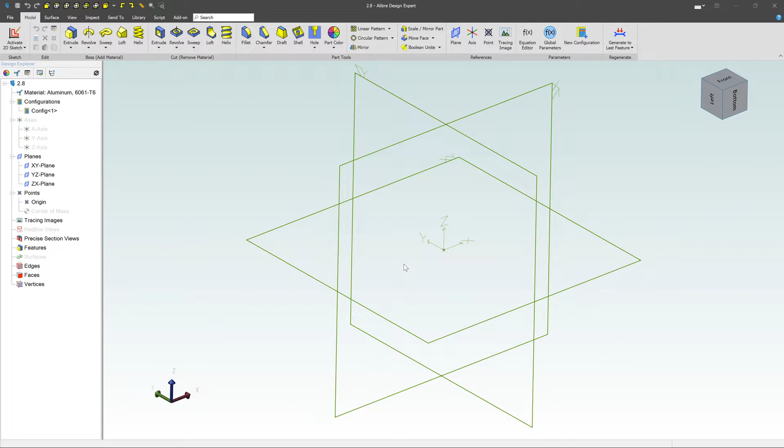To create a loft, we need a series of sketches that we're going to be creating a feature between. The most basic would be just two different planes. So I'm going to go ahead and hide a few of these other planes. I don't want to see this plane right here, or that one either right now. I just want to have this XY plane.

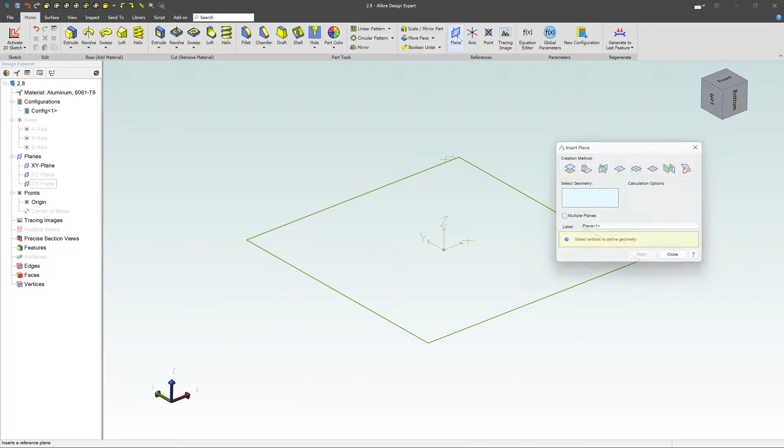So that's where I'm going to start with. Above that, I need to create another plane so I can have another sketch to draw something on. I'll go ahead and do that from the beginning. Come over here to references, then to plane. I'm going to choose that first plane right here, and all I want to do is an offset, so I'll say something like 5 inches. It's going to create a new plane directly above the old plane. Here it is, plane number 1. You can rename it if you'd like.

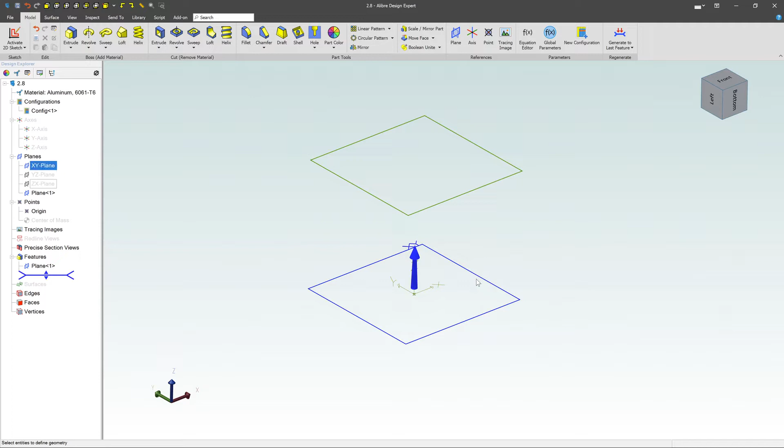Now what I want to do is create some individual sketch geometry. Come down here, select that plane, right click on it, and say I want to activate a sketch. Let's just do something super basic, like create a center point rectangle.

I'm going to start at the center and drag something out here. I'll type in something like 3 inches, hit tab, 3 inches again, and I've got a perfect square. Notice it's not fully defined yet because it doesn't know the rotation. If you don't know what's wrong, grab one of the nodes and pull it around—notice how it can rotate. A quick trick here is to select a line and say, let's make that one horizontal. Then everything shows up fully defined as black.

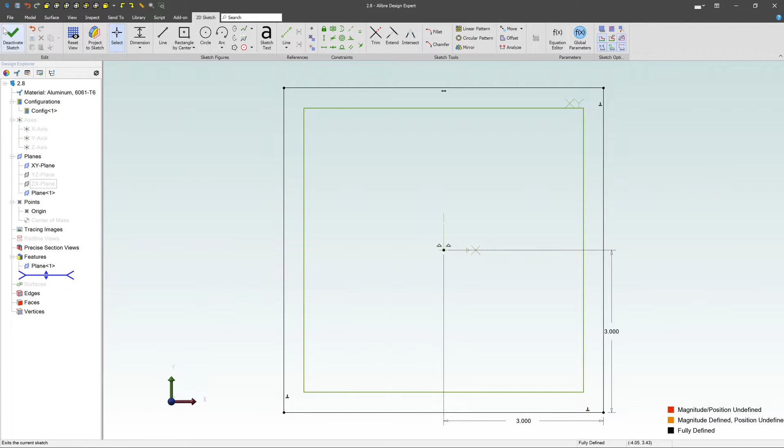Okay, deactivate the sketch. Let's look at it in 3D. So you can see here I've got my little rectangle—sorry, it's a square now—at the bottom, and then I want to draw something at the top.

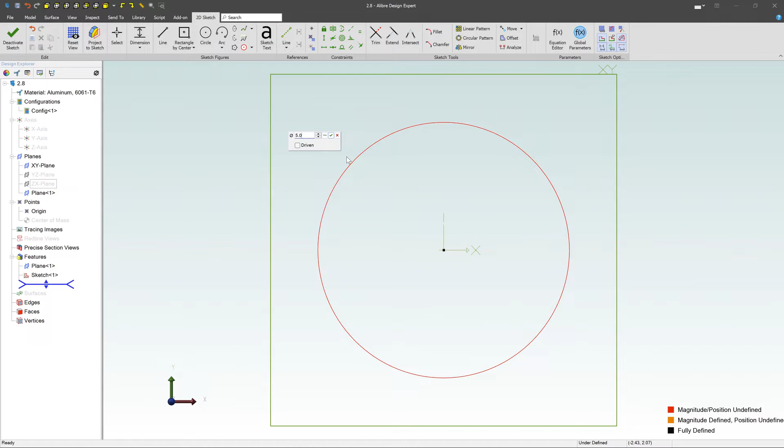Let's go ahead and select that plane, right click and say activate 2D sketch. This time let's try something like a circle—center point circle, drag it out, go ahead and add a dimension, click on the circle, here it is, let's say 5 inches. All right, and then deactivate the sketch.

So now what I have is 2 sketches. I've got a square down here, and a circle directly above it, and we want to create a loft feature between the two. Now, we can get a lot more crazy with lofts—we can add a whole bunch of different profiles, guide curves, and do center point or center line lofts. There's a whole bunch of different things we can do with lofts, and I don't have the ability to go through every single thing here.

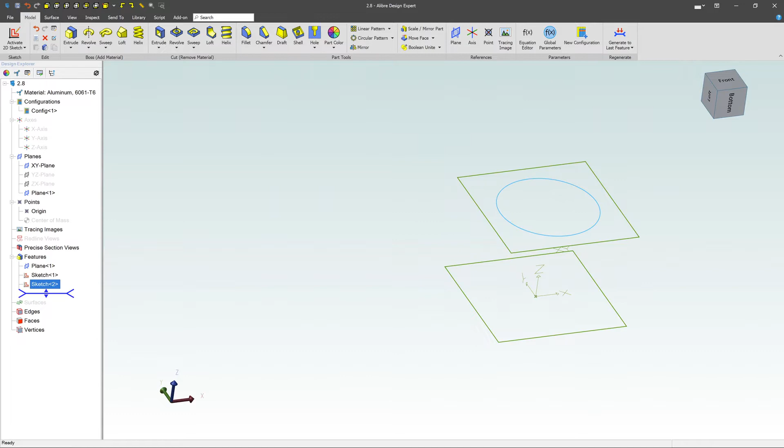But I just want to show you the basics of creating a loft and what's involved. So if you go over here to loft, it's going to ask me for my different cross sections.

So my very first point is going to be down here, and then it's going to go up to this one right here. Notice it gives you a preview of what's going to happen.

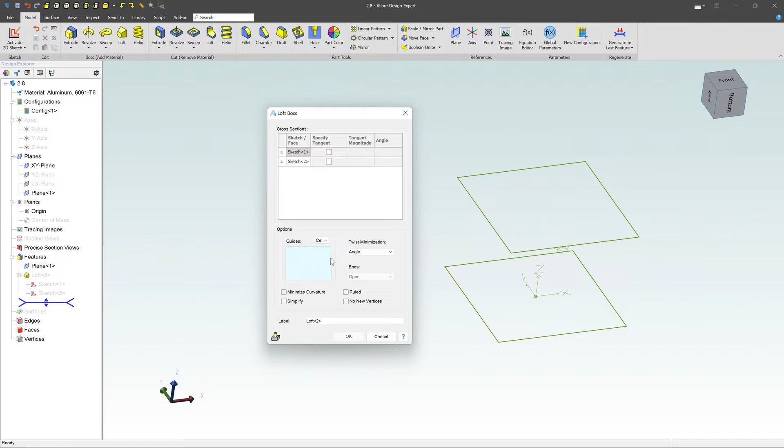It's going to take that point, bring it up here, and everything looks pretty good. Now notice I also have this thing called guides. If I say I'd like some different types of guides, I have different options - global, local, centerline, a couple different things I could use for this. If I define a line where it's going, I could come back and use some of these things. But right now we don't have any of those - those have to be separate sketches. So make sure you don't have that on right now. Just turn that to none and click OK.

All right, so there's our basic loft. Pretty straightforward, pretty easy to use.

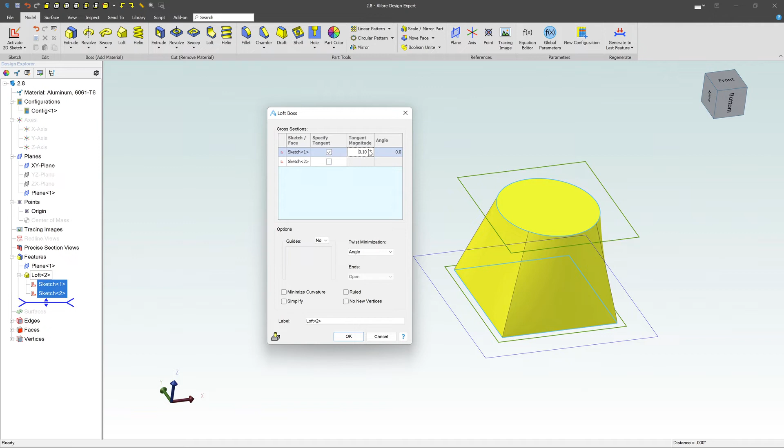Now, if you wanted to do something funky and modify this shape a bit, and didn't want these lines to come straight up, a lot of times you can go back into that loft, edit it, and do things. You can choose one of these options and change the twists, for instance. You can specify a tangency and type in a magnitude of tangency. Notice what happens - now you start pushing this line straight first before it starts turning and morphing into the other shape.

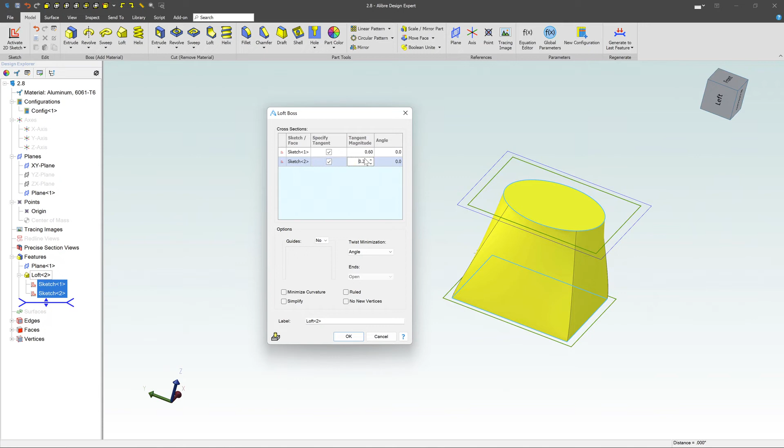You can keep going back into this edit feature and start doing this with some of these other things as well. I'm going to type in like 1, and some of these might make it fail. Take a look at this one here - now I'm pushing it back, and you start getting some more organic shapes, which is nice. A lot of times when you're dealing with lofted features, you've got to go back and play with it a bunch of times to make sure you're getting the shape you're looking for.

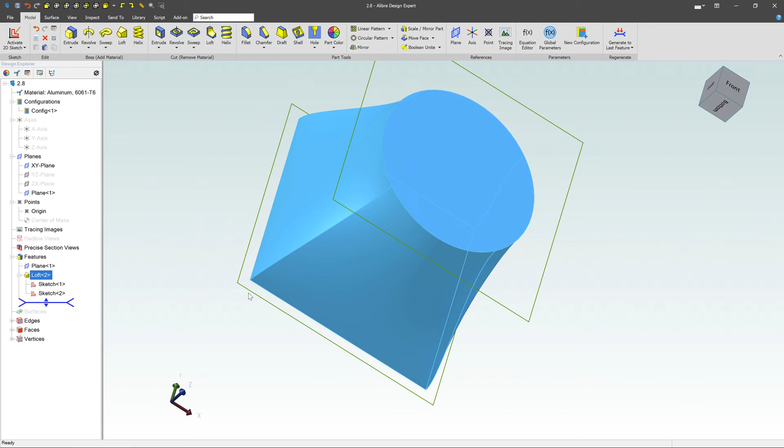Maybe you don't want these sharp edges on here, so you can come back and fillet them later, or go back to that original sketch and add some radiuses in the corners so you never have these sharp lines. But there's a bunch of different things you can do with lofts.

It's probably one of the more powerful things in Alibre Design as far as the ability to create these shapes. It allows you to use multiple profiles, multiple guidelines. You can get literally as complicated as you want to be. I've seen some of these lofts that have 30 different profiles and 20 different guide curves, and it takes a long time to set all that up to get to that final shape.

But that might be the ultimate shape, and they do that a lot for free-flowing shapes like a car body or a wing section - something where you're creating these very complex shapes that take a lot of time to set up. Once you have that shape, that's the final thing you need. Anyways, that's the basics for lofts. In the next video, we're going to be diving a little bit more into some of the different guide curves and things like that.